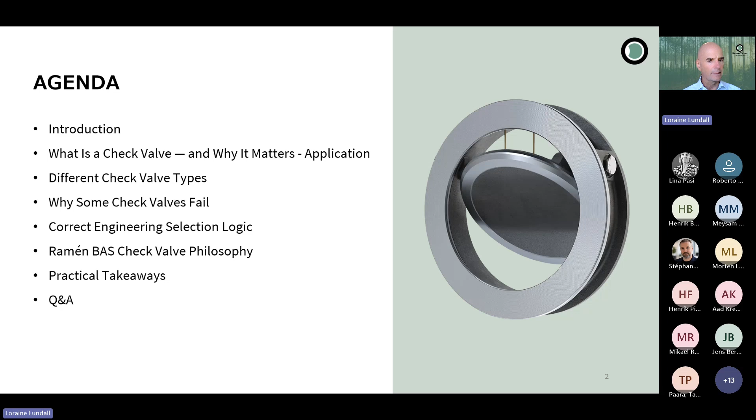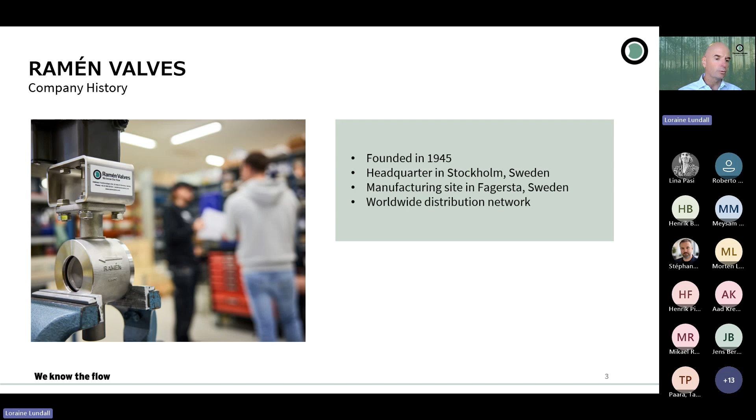So who is Ramén? Ramén was founded in 1945 with headquarters in Stockholm, Sweden. We have our own manufacturing facility in Fagersta, Sweden, and a worldwide distribution network. Ramén has several products and services like control valves, tank safety equipment, safety relief valves, and we also do service in Sweden. Ramén manufactures its own ball sector valve, the Ramén VAC, which is the vacuum breaker, and the Ramén BAS check valve, which is what we're going to discuss today. We also have several agency products for the Scandinavian market.

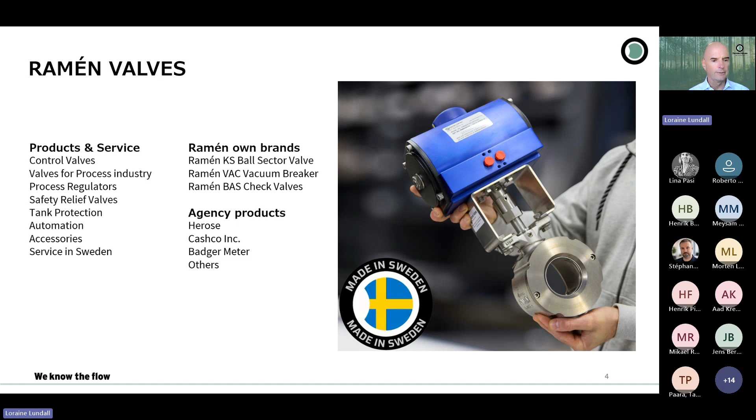You can find us in several industries, actually all of them: marine, pulp and paper, energy, chemical, mining and minerals, food and beverage, and water and wastewater, to name a few.

This session is not intended to be a product presentation. It is an engineering-focused discussion about why valves behave differently, why some systems chatter, why others remain stable, and how to think about selecting more dynamically and realistically. But before we continue to discuss stability, chatter, and sizing philosophy, it is important that we first establish a common understanding of the basic functions of check valves.

At its core, a check valve is an automatic protection device designed to allow forward flow and prevent reverse flow. Unlike control valves or isolation valves, a check valve operates entirely from the dynamic forces generated by the fluid itself. When the forward flow force becomes strong enough, the disc opens.

When the force decreases or reverses, gravity and the internal spring, if equipped, drive the disc back into the seat, reversing the fluid flow direction. This sounds simple, but in reality the disc movement is highly dynamic, continuously responding to velocity, pressure, density, turbulence, and changing operating conditions.

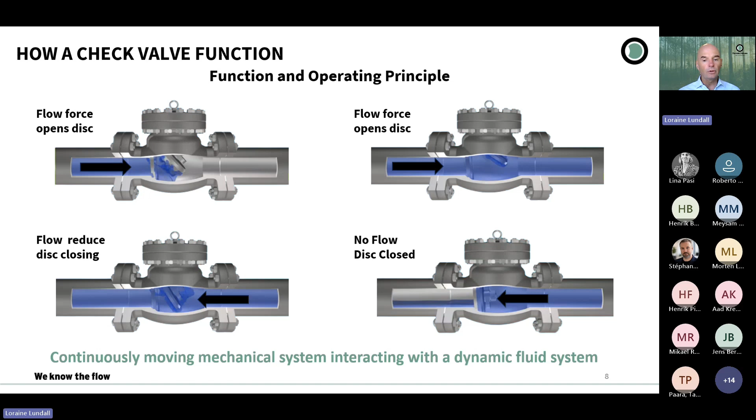That means a check valve is not simply an open or closed component. It is a continuously moving mechanical system interacting with a dynamic fluid system, and that is exactly why proper selection matters so much. Sizing a check valve correctly means ensuring the fluid has enough strength or force to hold the moving mass, the disc, stably open.

So why do we spend time discussing a simple check valve? Well, because its failure ripples throughout your entire project and your budget. When a pump or compressor shuts down, the high pressure fluid downstream wants to rush backwards. If your check valve fails to close fast enough, that reverse flow will spin your expensive pump impellers backwards, destroying bearings and snapping drive shafts.

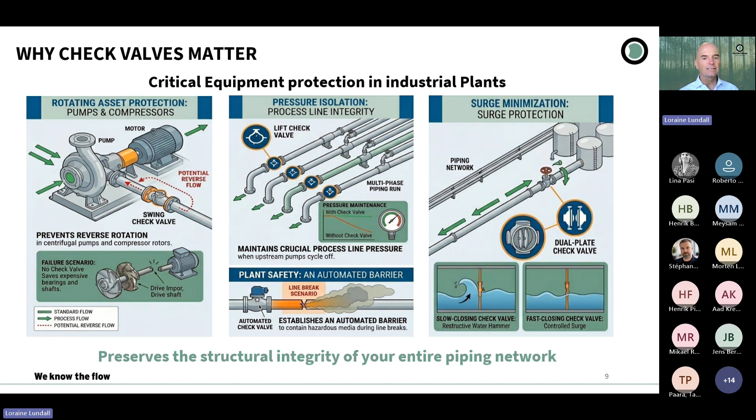Additionally, too slow closing check valves allow massive columns of fluid to gain reverse momentum, resulting in catastrophic water hammer, and they finally slam shut. Considering an emergency shutdown valve that needs to close within milliseconds, that will cause sudden backflow in your piping system. A reliable check valve doesn't just block reverse flow, it preserves the structural integrity of your entire piping network.

So where are check valves used? They're used everywhere, but every process application treats them differently. In high mass liquid loops like water distribution or district heating, we deal with incompressible fluids where controlling hydraulic shock is the main priority. In steam loops, the valve must withstand thermal cycling, flashing, and water droplet erosion, but also protect against condensate reverse flow due to system pressure changes.

When you move into gas service or compressor lines, the fluid becomes highly compressible and sometimes low in density. A check valve design that runs perfectly in a heavy, dense water line can easily fail when installed in a light density gas. So as manufacturers, engineers, distributors, and end users, we must evaluate the media first, not just the pipe size.

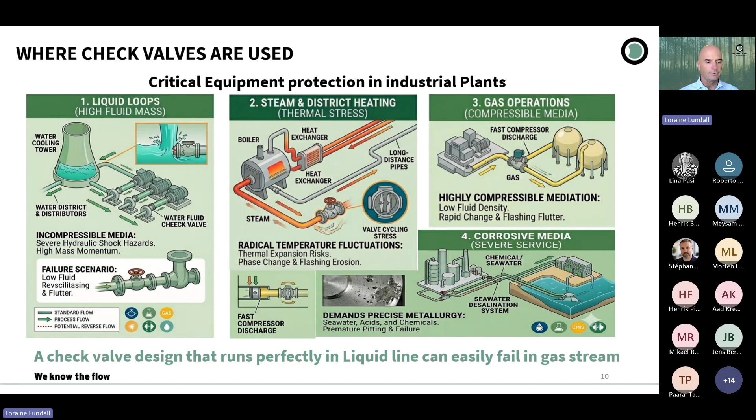So let's get into some different models of check valves. Let's look at the primary check valves you will find in the field. Think of the Ramén BAS 102 as your high efficiency baseline check valve. Because there's no spring resistance, your system pressure drop is minimal. However, it relies entirely on backflow velocity and gravity to shut. It helps in steady, clean lines where sudden flow reversal and severe water hammer are not a threat.

The BAS 302 is our proactive problem solver. By adding a spring, we ensure that the valve closes the exact millisecond flow velocity drops to zero, well before the fluid has a chance to reverse direction. This simple mechanical addition of a spring is an insurance policy against water hammer and instability.

When dealing with large pipe diameters, heavy flanged swing check valves become structurally and economically a nightmare. Standard wafer check valves and double door check valves solve this by slashing weight and footprint, offering incredibly fast closing times across big pipelines.

The tilting disc, however, like an airplane wing, has a pivot point that allows it to open fully with minimal travel distance. It excels in high energy steam and water applications because it bridges the gap between low pressure drop and rapid non-slam closure. It does come, unfortunately, with a high cost.

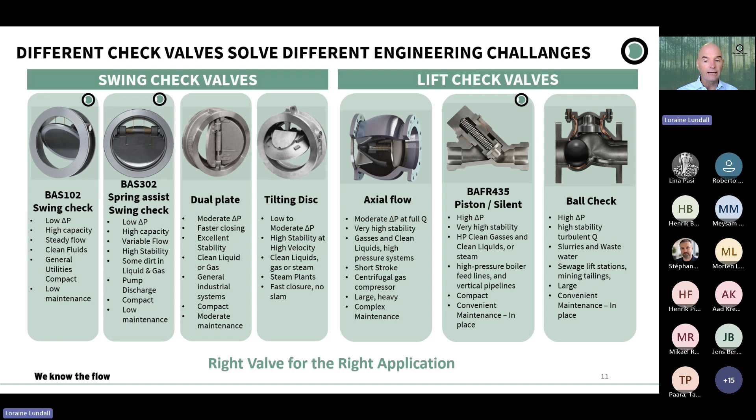The ball check valve, on the other hand, has a ball that opens and closes as the flow passes through. The design is valued for simplicity and tolerance, with a lot of tolerance for contaminated and solid laden media and slurries. However, I want to bring your attention to the Ramén EDS Extreme Duty Service.

Traditionally, swing check valves are only used in clean liquids and gases with limited particles. However, our BAS swing check valve with the Ramén EDS Extreme Duty Service coating for abrasive service provides a coating harder than ceramic-lined check valves, and has proven with great success in abrasive media applications where ceramic and standard ball check valves have failed.

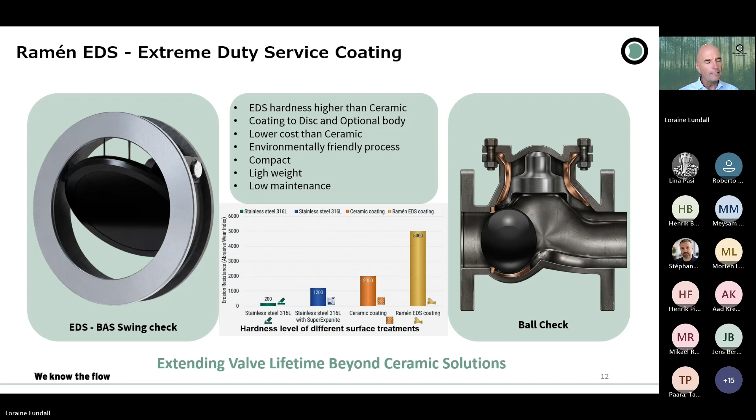Good. So where does Ramén fit into the picture?

In the triangle below, you will see low pressure drop, dynamic stability, and fast closure at the corners. Different types of check valve bring different benefits, approximately placed. A swing check valve without spring assistance has very low pressure drop. Axial check valves have fast closing. Spring-assist check valve is right there in the middle. Dual plate and wafer style check valves sit between speed and compactness. Tilting disc is for high stability.

But within the wafer swing category, especially with the option of spring assistance, the Ramén BAS302 concept is positioned as a strong technical balance solution - a little bit higher pressure drop, but good stability and fast closure.

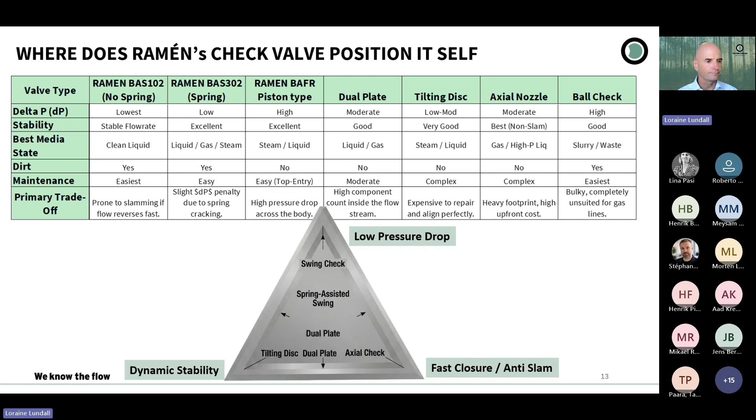So this is why we are here today: why some check valves fail. Let's demystify why check valves fail in the field. The most destructive killer in the check valve isn't backflow or water hammer - it is a phenomenon called mechanical chatter.

When a valve is only partially open, the disc hangs unsupported in the middle of the turbulent flow. It begins to flutter, vibrate rapidly like a flag in the wind. If the flow force isn't strong enough to push it all the way open, the flutter escalates to chatter, when the disc physically hammers against its own seat and internal travel stop hundreds of times a minute.

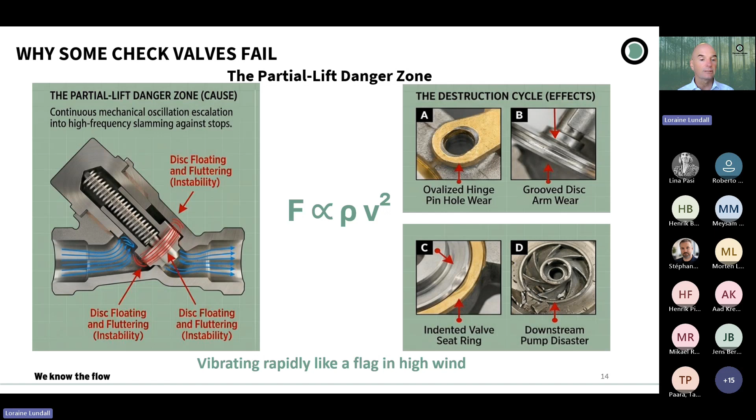This structural hammering wears hinges and pins down to threads, turns round shaft journals into ovals, and sometimes breaks internal parts off completely. Those pieces wash down the line, wreaking havoc on downstream equipment like pumps, turbines, valves, and flow meters.

Another reason why check valves fail is that focus is only on certain parameters. In many industrial projects, check valves are selected primarily using line size, flow capacity, and pressure drop requirements. These are important, but not sufficient. A valve can pass the required flow, meet pressure drop requirements, and still fail dynamically in real situations. This is one of the major engineering problems with oversimplified sizing.

Because check valves are not static components, they are dynamic mechanical systems. The disc is continually responding to fluid force, gravity, spring force, turbulence, and pressure changes. So when we have a valve that can pass enough capacity and the delta P is acceptable, we may completely ignore stability, chatter risk, and transient flow behavior. That is why two systems that look acceptable on paper can behave completely differently in operation.

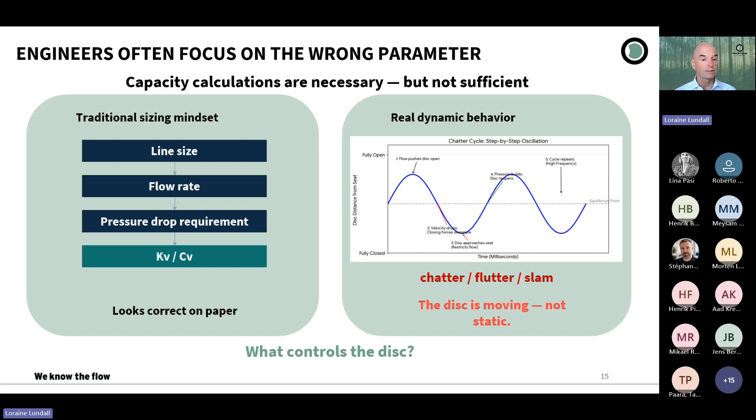So the real question is, what actually controls the disc? Well, velocity is not what controls the disc, although most manufacturers state the resistance curve versus velocity based on water. The equation explains most check valve stability problems: dynamic force F is directly proportional to, or equal to, density times velocity squared.

So, fluid density multiplied by the velocity squared. This means velocity alone does not determine stability - the density of the fluid is equally important. Let's compare water and gas. Water has very high density, which means even relatively moderate velocities can generate strong stabilizing force on the disk.

A gas is completely different. Gas density may be 50, 100, or more times lower than water. So even if the gas velocity appears acceptable, there may still not be enough force to hold the disk fully open. This is why many engineers become confused - they see a velocity that looks acceptable, but the valve still chatters. The reason is simple: velocity is not the real controlling parameter.

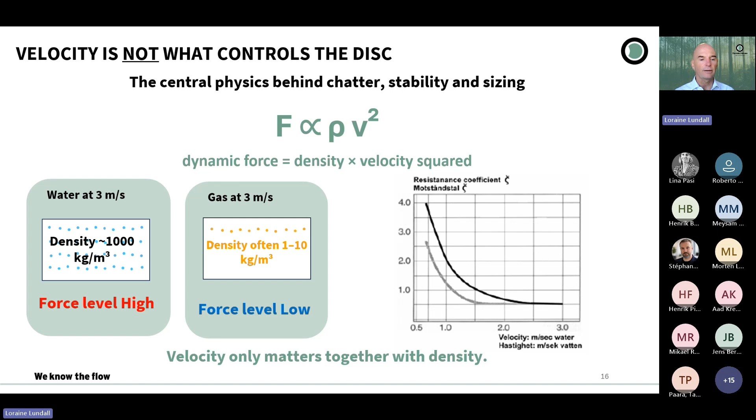Dynamic force is the controlling parameter. And because density changes significantly between liquids, gases, low pressure gas, high pressure gas, and steam, the check valve behavior changes dramatically as well. Continuing with the formula from the previous slide, gas systems are often some of the most difficult applications for check valves, especially low pressure gas systems. The reason again comes back to density - at low pressure, the gas density becomes very low.

This means that the gas simply cannot generate enough stability force on the disk. The result is flutter, unstable opening, chatter, or accelerated mechanical wear.

Now compare this with a higher pressure gas. With higher pressure, the density increases, stabilizing forces increase, and the valve becomes more stable. This is exactly why 5 bar CO2 behaves completely different compared to that low pressure system. The valve itself did not change, the physics changed. This is also why low pressure gas applications often benefit from spring assisted design, different check valve types, or reduced valve sizes.

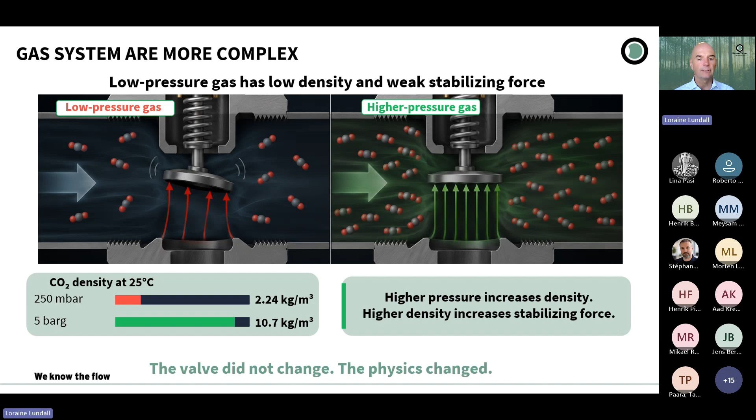So one of the most common mistakes in check valve selection is oversizing. The widespread practice is selecting the valve size equal to the pipe size without evaluating flow conditions. Many engineers assume larger valve size equals safer design, or choose a line size valve. Here is the single most common mistake made by technical buyers and engineers: ordering a check valve based strictly on the pipe diameter. Sizing software will back you up, showing that it's a beautiful, ultra low delta P.

But for a check valve, this is often the opposite. As diameter increases, velocity decreases. But here is the trap: a larger valve has a massive internal flow area, and with a massive internal flow area comes lower velocity. And with lower velocity, the dynamic stability force drops as well.

Remember the equation earlier? So a valve that appears hydraulically safe from a pressure drop and Kv perspective may actually become dynamically unstable. This is one of the hidden dangers of selecting only for low delta P and line size. If your flow rate drops, low velocity cannot generate enough lift to push the heavy disc open to a stable backstop. The disc becomes trapped halfway between that and sitting directly in the highest zone of fluid turbulence.

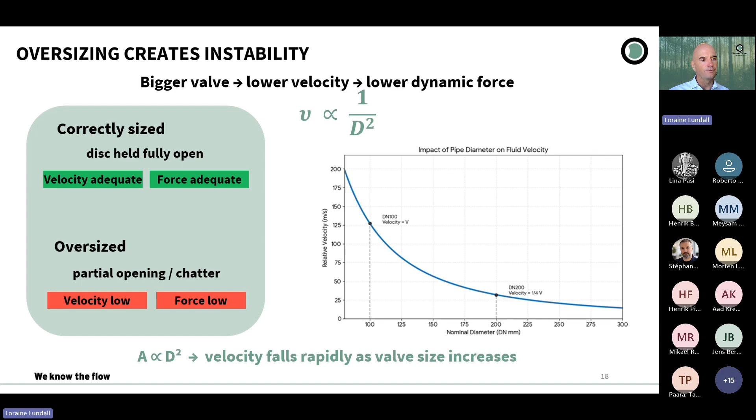Many people think that springs are only for closing the valve. Well, from an engineering perspective, the spring is also a stability device. It changes the force balance on the disc. It helps damp oscillations, reduce flutter, improve low flow stability, and reduce slam during shutdown. This is especially important in low density gas, compressor applications, and fluctuating flow. The trade-off, on the other hand, is increased cracking pressure and resistance. But in difficult applications, that trade-off is often well worth it.

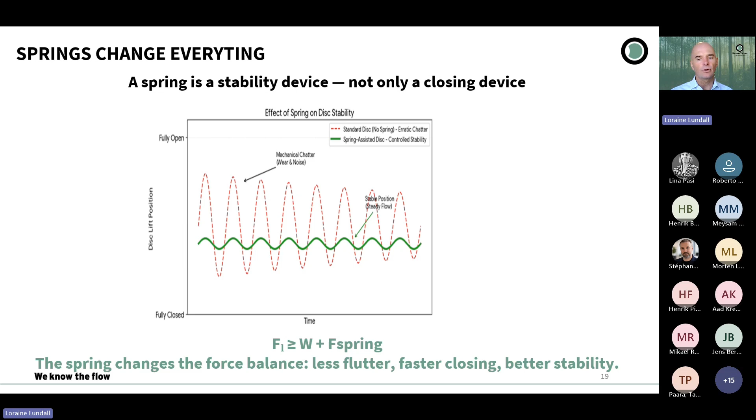So you do not get everything. One of the most important realities in engineering is that every design improvement creates a trade-off somewhere else. Check valves are no exception.

If we increase valve size, pressure drop decreases and capacity increases, but stability often becomes worse. If we reduce the valve size, stability might improve, but pressure drop might increase. If we add a spring, stability improves, slam improves, but the cracking pressure and resistance might be sacrificed. So there's always a trade-off.

There is no universally perfect check valve. Every application requires balancing capacity, pressure drop, dynamic behavior, and operational stability. That balance is what real engineering selection is about.

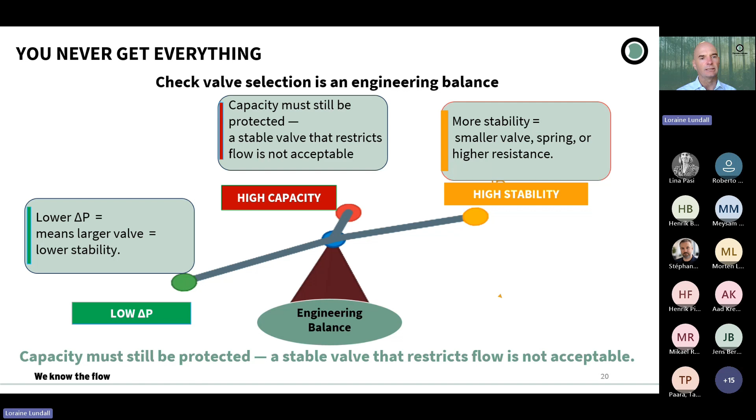So the correct engineering selection sequence is: inputs, capacity, size for delta P, determine if it's stable, assess the dynamic risk, and then check for warning signals from this.

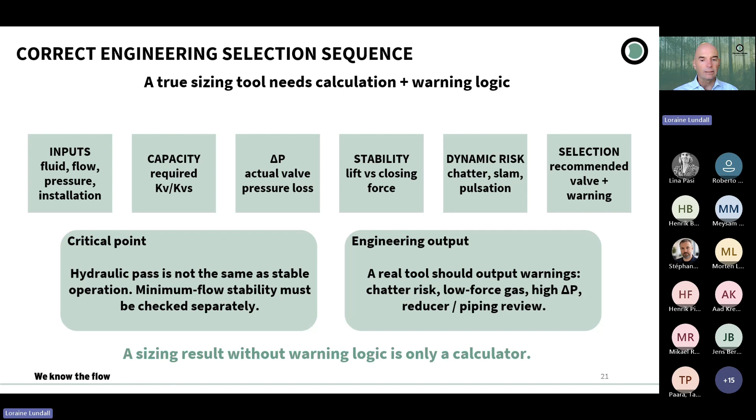The important point is that hydraulic pass is not the same as a stable valve. The tool or engineer must also ask: will the disc remain stable at minimum flow? That is very important. And is the selected valve practical in this line? The sizing result without a warning logic is only a calculator, not an engineering tool.

So what are our final takeaways? Stop thinking of velocity alone. Velocity is useful, but density changes the meaning of velocity. Oversizing can create instability. Springs are stability devices. Valve type selection is about trade-offs. The correct valve is not just the one that passes the datasheet calculation. The correct valve is the one that remains stable and reliable in the real system.

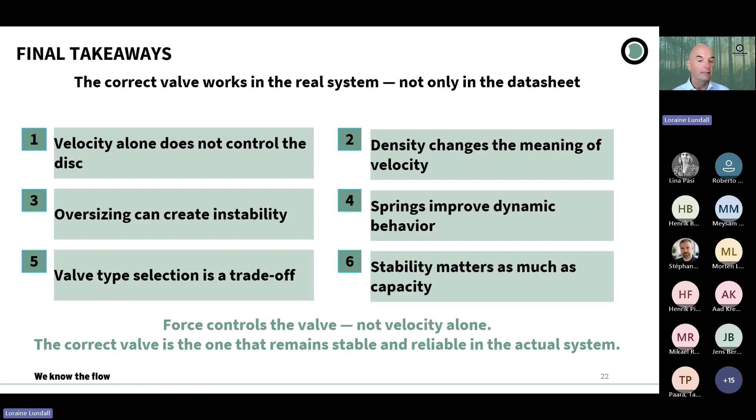So now I want to quickly get into our product line. Ramén does not offer a single valve type and claim it fixes every problem.

As Ramén Valves, we know that different piping environments introduce entirely different mechanical stress. We match internal valve mechanics directly to the reality of your process flow.

Every valve in our BAS or BAFR series is built on rugged, heavy-duty hardware. We utilize thicker shafts and thicker discs, beefed up hinges, and tightly toleranced journals. This eliminates the common headache of ovalization and mechanical wear caused by systematic line turbulence. You get extended valve lifespan and drastically reduced maintenance.

For steady high density liquid lines where power consumption and pumping costs are critical, our BAS 102 is the go-to because it has no spring. It offers a completely unobstructed flow path and very low pressure drop. It opens at the absolute lowest flow rates, maximizing system energy efficiency and saving operational power cost.

Conversely, if you are dealing with variable flow, low pressure gas applications, or loops prone to pipeline flutter, we step up with our BAS 302. The integrated spring assist acts as a continuous mechanical stabilizer. It provides a constant counterforce that eliminates low flow chatter and guarantees fast dynamic response to stop backflow before it can slam. Note that on the size scale, we can take the stability all the way up to DN600.

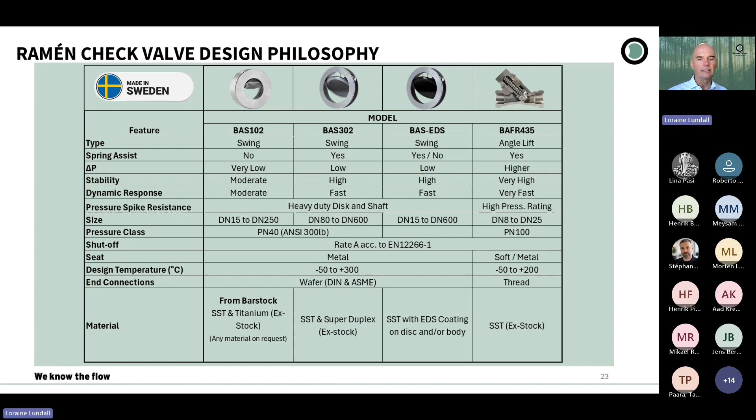12266-1. Unlike mass production valves that suffer from porosity defects, our BAS 102 check valves are machined from high integrity solid bar stock material in our production facility in Fagersta, Sweden, and we have stock for both super duplex and titanium materials. Since it's machined from bar stock, we can readily manufacture it from other high alloys and exotic materials on request.

So where we are for high volume utility lines, district heating and cooling waters, the ultra low pressure drop of our BAS 102 keeps massive volumes moving while keeping your energy bills to the absolute minimum.

In gas distribution and variable flow process industries, where low pressure drops can cause standard valves to flutter to death, our spring-assisted BAS 302 eliminates chatter completely.

For high temperature, high pressure gas, steam, and condensate systems, the rugged BAFR 435 angle design handles thermal and pressure shocks without breaking a sweat.

And finally, for aggressive media in chemical plants and corrosive seawater systems, our premium alloy bar stock like titanium and super duplex combines with our rate A leakage to ensure maximum environmental safety and compact lifespan.

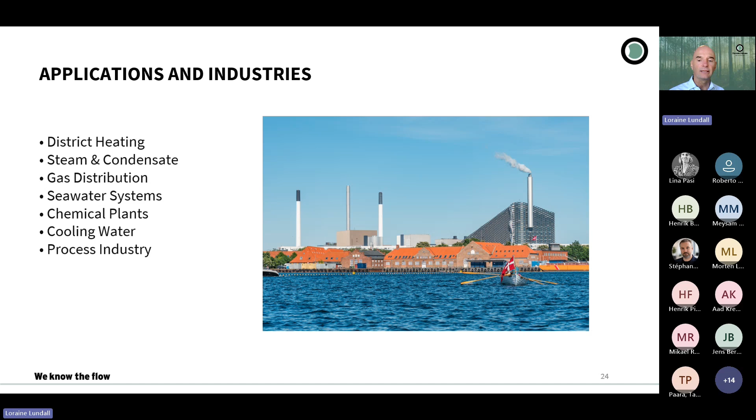The bottom line: we don't expect one valve to fit all of the industries. We provide the exact mechanics and metallurgy to conquer each application.

So on our product platform, you can go to process valves, go to the configurator. On the configurator, you choose BAS 102, 302, or the BAFR, and then you can select the line size and type, and it will give you the price if you are logged in, along with your discount.